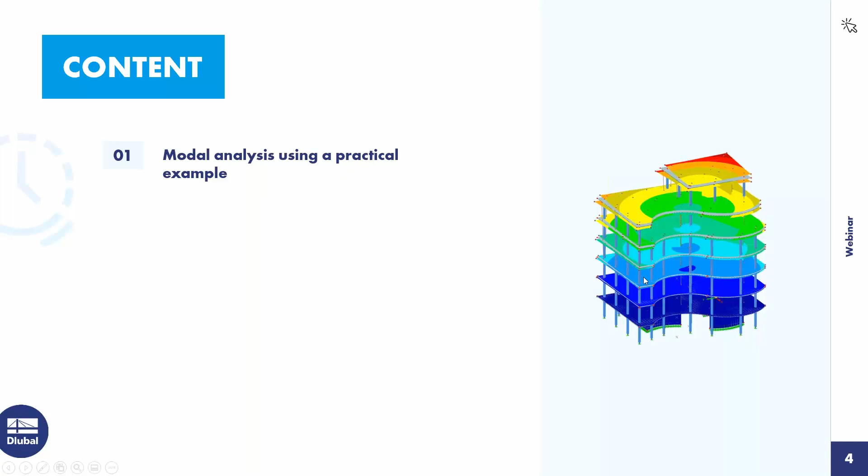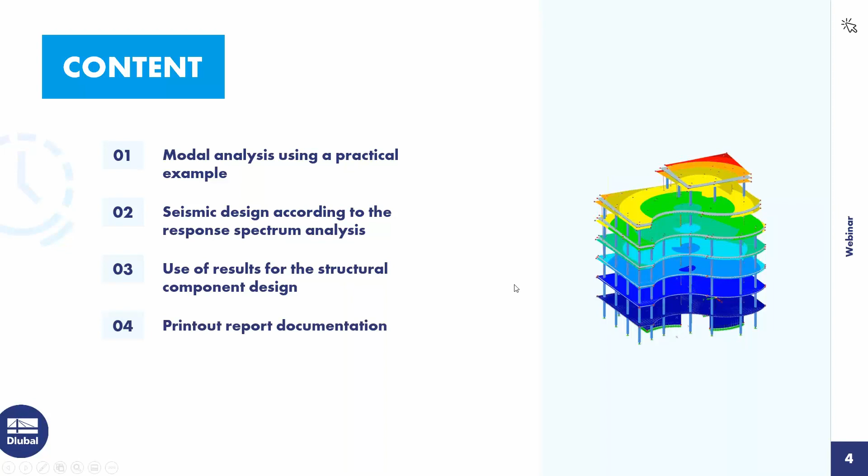To the agenda today: first point is modal analysis using a practical example, that's the example here on the right side of the screen. Then point 2, seismic design according to the response spectrum analysis. Then use of results for the structural component design. And the last point is printout report documentation.

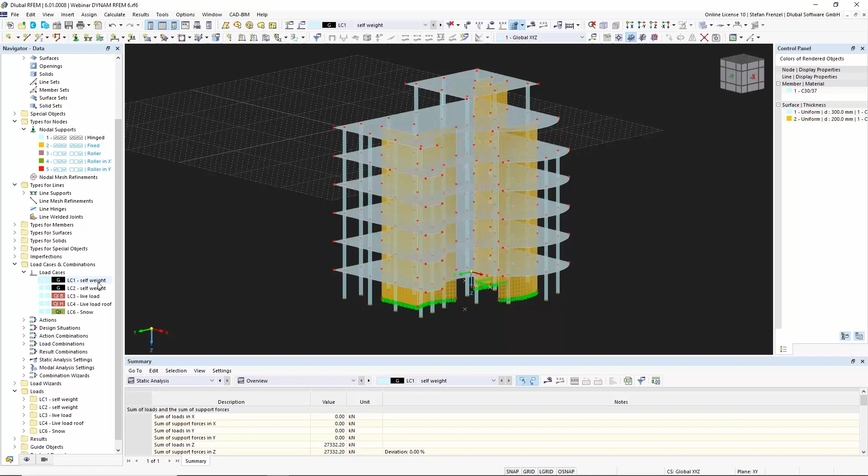So how can we do a modal analysis? A modal analysis is not another add-on module anymore, so we can define the modal analysis directly in a load case. That means in the load cases we have categories, and for this category static analysis is clear - we can calculate internal forces, but here it is also possible to do a modal analysis. If we want to do a modal analysis, then it's of course possible to choose the masses which have to be imported into the program.

You see here load case number 1, the self-weight. We want to import the masses from load case 1 into this modal analysis. That means the self-weight is activated, and we have here some modal analysis settings.

That means modal analysis setting 1. We want to calculate 4 eigenvalues with a Lanczos solver. It's also possible to change the settings, add some settings, or delete the settings if you want.

These settings are normally just important for the modal analysis. At first you have to choose how many eigenvalues you want to calculate for the structure. In our case, we have 4 eigenmodes. It's also possible to calculate automatically to reach the maximum natural frequency, where you give in a maximum frequency and the program will calculate so many eigenvalues until 1600 Hertz.

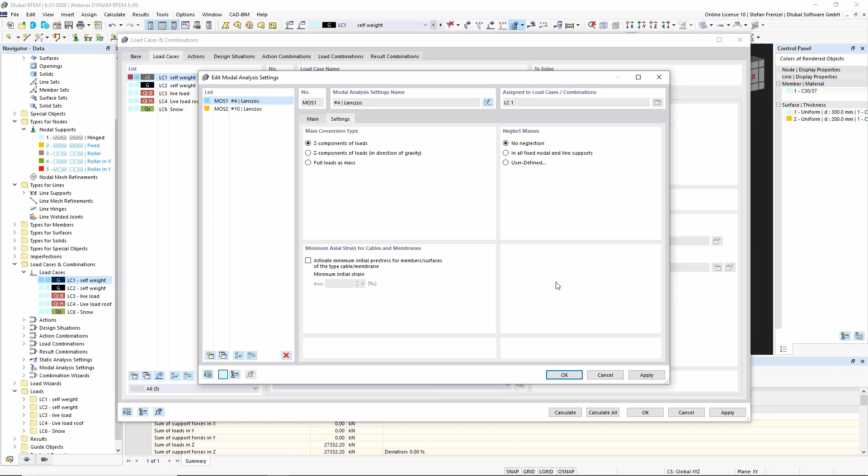We also have here a user-defined option, which is really easy. You can directly choose surfaces, lines, members, or nodes where you don't want to have the masses included in the calculation. I want to show you that a little bit later. At first I want to click here on OK, and then we click also on OK.

We have to delete the results, that's clear for us. Now you see on the top that we have a small red button and a blue one. The red one means it's not a static analysis, so that means here it's a modal analysis. We do the calculation now.

The program will now calculate the eigenvalues of the structure with a Lanczos solver. Here just one core of the computer is used, caused by the eigenvalue analysis. It's not possible to use more cores than one.

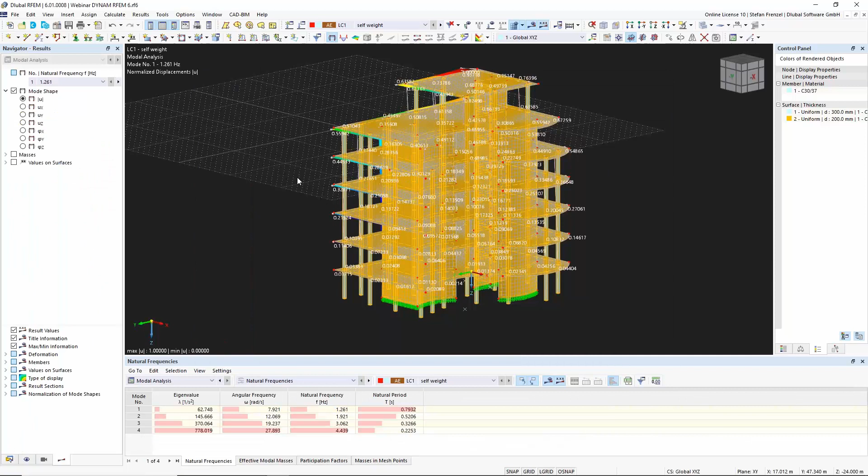And then you see the results. That was normally really easy. So we have now the natural frequencies, where you can choose, for example, the second frequency or the third one, and that's all now in the navigator, so in the navigator of the results.

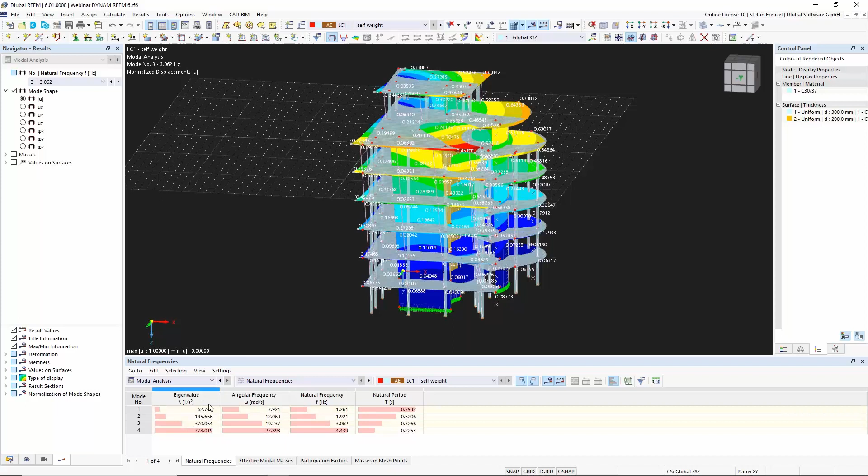Another thing is that it's possible to have a look in the table on the bottom, where you can see the natural frequencies, the eigenvalues, the natural frequency, the natural period. Then you see, of course, the effective modal mass factors.

These effective modal mass factors are also important, because normally we need 90% of the effective modal mass in each direction for the earthquake calculation, and these you can see directly on the top or on the bottom. We also have the rotational effective modal mass factors, but that's normally just for development, not so important for the normal user, because the normal user who wants to calculate earthquake loads uses normally just the translational effective modal masses, which are in X and Y direction, and maybe sometimes in Z direction.

The participation factors are also given out here, you can see it on the bottom. And then you see the masses in mesh points. Maybe you know this from RFEM5. It's also possible to have a look at the masses in the FE mesh points.

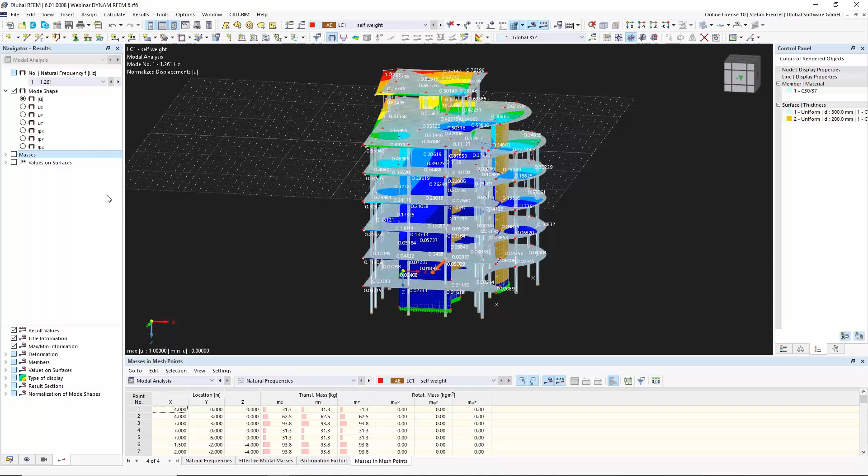That's normally not so easy to get a good look at this table, because you have to scroll down and maybe you don't find the node you want to use. Therefore we now have a graphical output for that. You just go to the navigator for results, click on masses, and the program will show you all masses at each FE mesh point. Let me zoom in a little, and then you see what we call mass balls in each FE node.

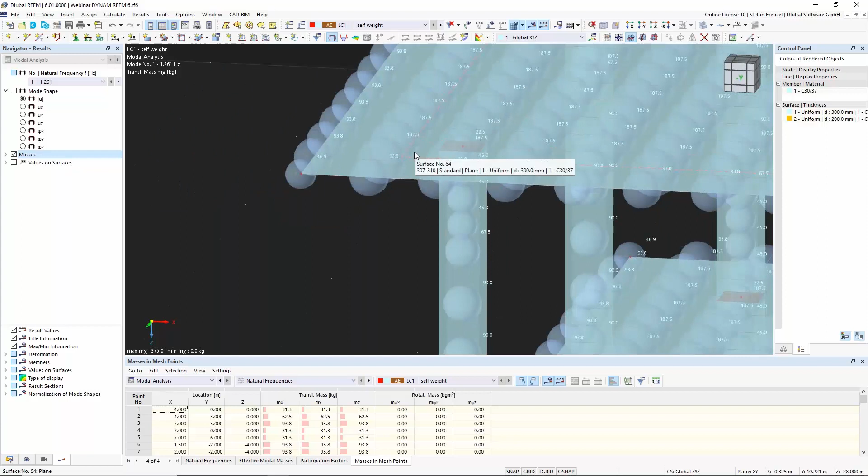Here you can have a look at them, and maybe decide, for example, that you want to deactivate the masses for this surface or for this top surface, then you can control it afterwards. So we go to Edit, and here in our modal analysis settings we can neglect the masses. I want to use user-defined, and I just have to click my object, what I want to have, and that's all. Please neglect masses in all directions and around all directions.

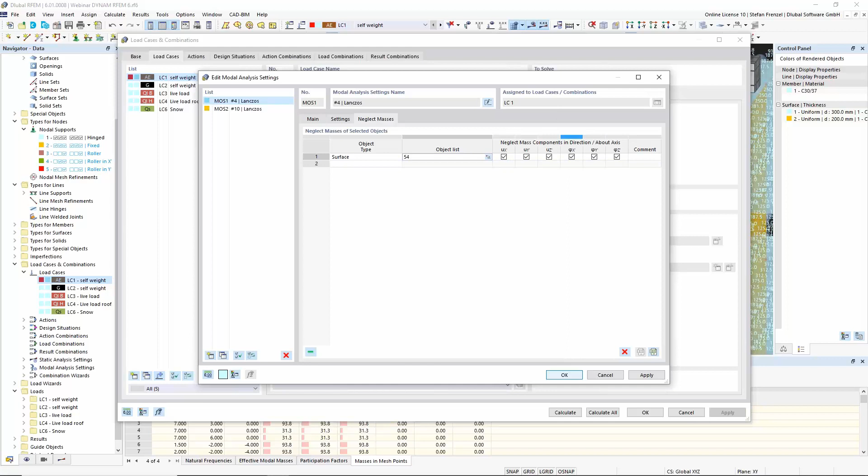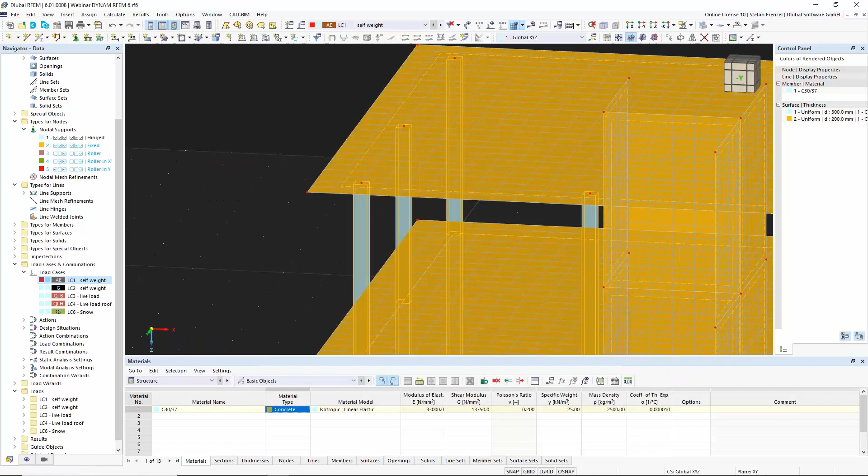If I do this and run the calculation again, I will get the result. When I look at the masses now, all masses will be neglected on the surface. I think that's an advantage in RFEM6 that was not possible so directly in RFEM5, because here you see directly the values at each point, each FE mesh point. It makes it really easy to control the whole result.

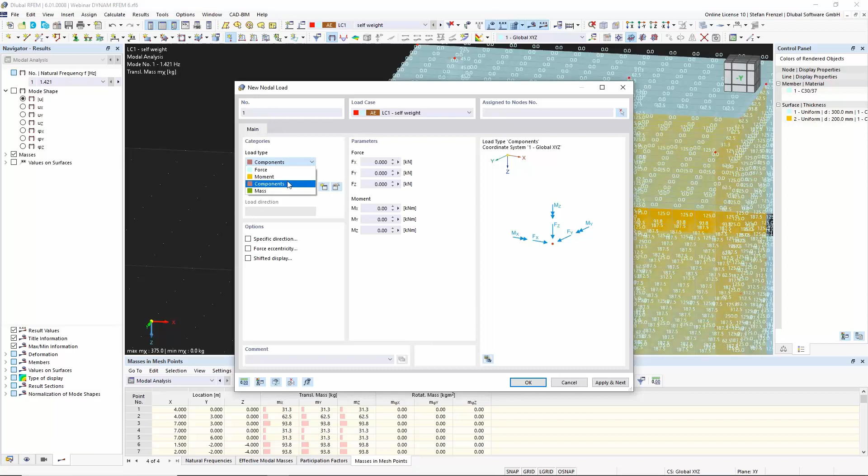Another option here, if you do such a modal analysis - in RFEM5 it was also possible to add additional masses, but only in the add-on module. Here we changed it a little, and now it's possible to add masses with normal nodal loads, line loads or surface loads. If you click on nodal load, for example, then for the load type you can choose a mass.

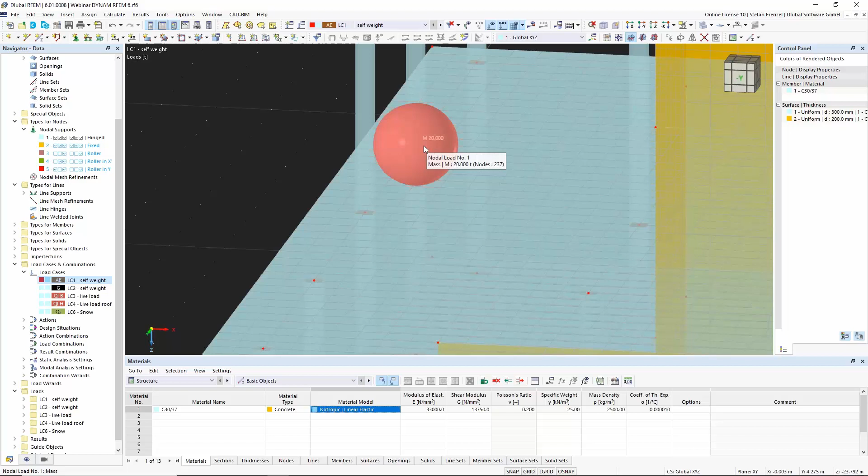If you write in a mass, maybe 20 tons, and put it in here, then you will see in load case number 1 a mass ball with 20 tons. This mass ball is also considered now in the modal analysis of the whole structure. That's just what I want to show you here - it's also possible to do it for surface loads and member loads, to add additional masses in the program and have a direct view of them. That was not possible in the old programs, and that's also an advantage here.

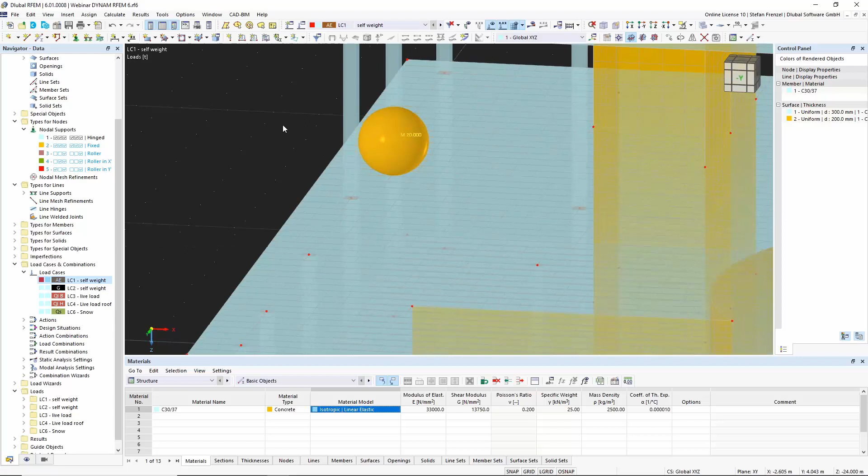So then I want to delete this load, because now I think we want to do a real modal analysis for the whole structure. Therefore I will first change my modal analysis settings, because here we also have the neglection of masses on, so we don't want this, and we want to calculate 12 eigenvalues with a diagonal matrix, which is completely enough for a calculation afterwards for earthquake calculations. We just want to consider the x and y direction, so I deactivate the other direction z, and also about the axes x, y, z, because it makes no sense for us.

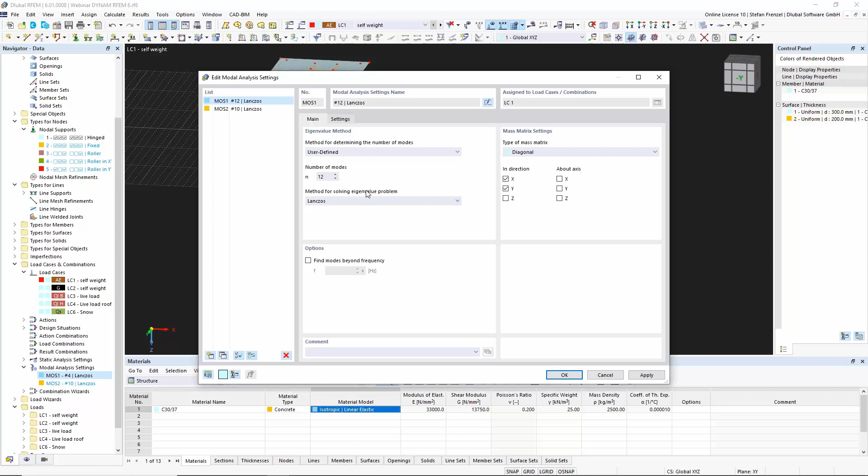The calculation is faster when I don't have to consider all directions, and it's easier for me to reach the 90% effective modal mass factor afterwards. So I don't need so many eigenvalues for that. This means the performance is better afterwards.

Okay, now we are here in our structure. How was it in the old one? It was normally always like this - did we do a static analysis here? Wait a second, I just have to change it back. So that we now need, of course, a modal analysis. If we want to do such a modal analysis, then I first have to choose a design code.

For example, here in our structure, should it be Eurocode 8? You can also choose ASCE or whatever - that's not so important for the program, but the important thing is we can now create a design situation. For this design situation, it's possible to create a seismic mass combination. That means the program will calculate a mass situation for our modal analysis according to a design code, and the program will do it automatically.

So that means for us, if I go now to action combinations and load combinations, the program creates here a load combination. So now I have my masses, which I need for the design, or which I need for the modal analysis according to the standard.

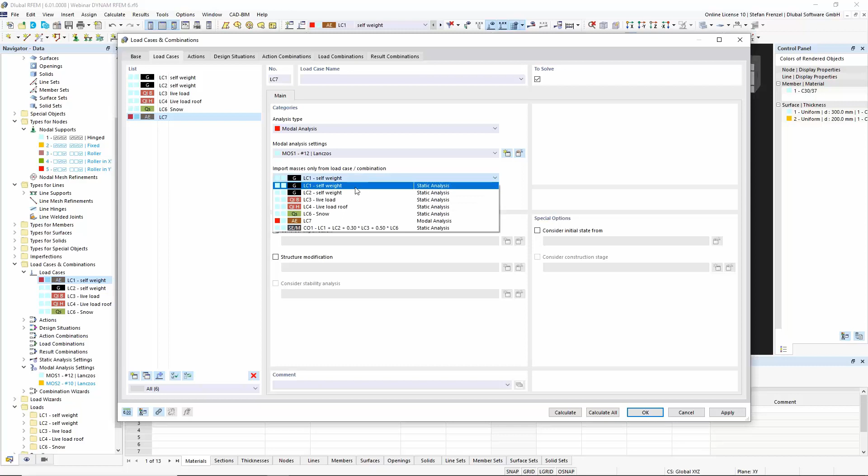The important thing now is that we can use here the automatically created load combination for my seismic mass combination. That's important, because that was not possible in the old one. Here it is now possible to consider this mass combination or load combination for the calculation of the modal analysis, or of the eigenvalues.

With this option, we go here now on OK, and then we do a calculation of the whole structure. You will see now the program will calculate all load cases and, of course, the seismic mass combination, and afterwards the load case number 7, my modal analysis.

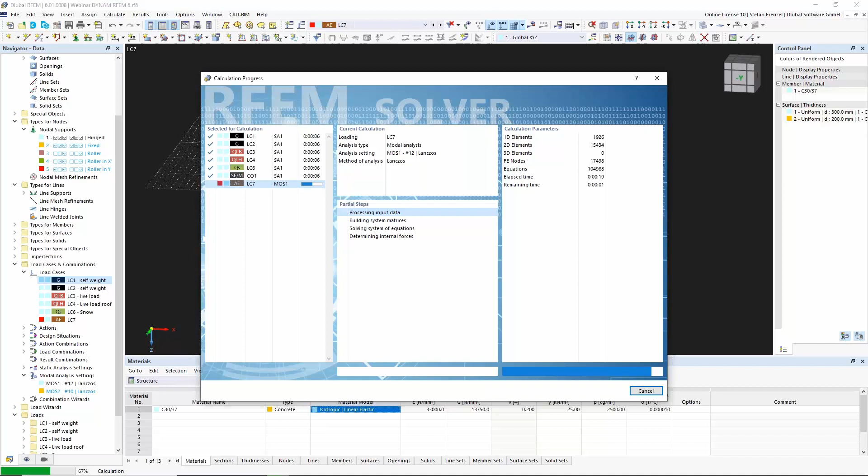In this case, you saw also that the program calculated all load cases nearly directly at the same time. That means we have here a multi-core calculation. The program can use all cores of your CPU, which makes it really fast in this case.

So now we want to deactivate the masses because I don't want to see them. Here maybe I want to have a look on the mode shapes. But what is important for me now here, it's really easy.

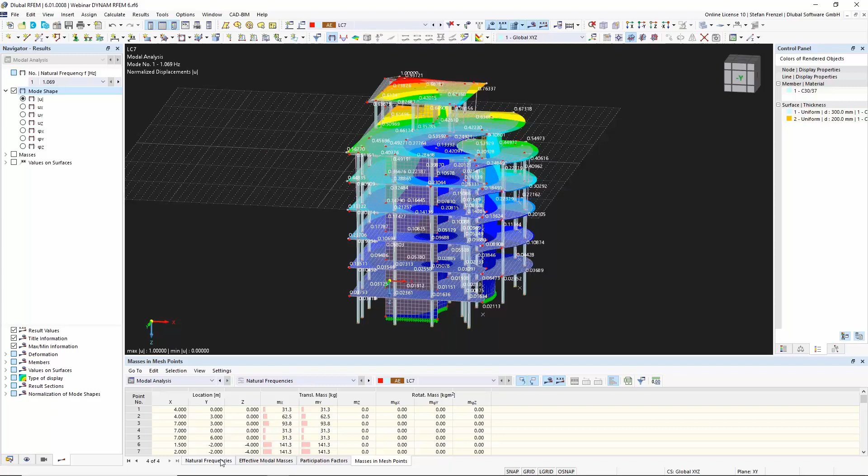The important thing, of course, is the effective modal mass factors. So therefore, I just have to click here on the modal analysis, the natural frequencies or the effective modal mass factors, what I want to see.

And now I can see I have 97% in the X direction, and nearly 94% in the Y direction. What is now really good for me, because with these values I can of course do a response spectrum analysis.

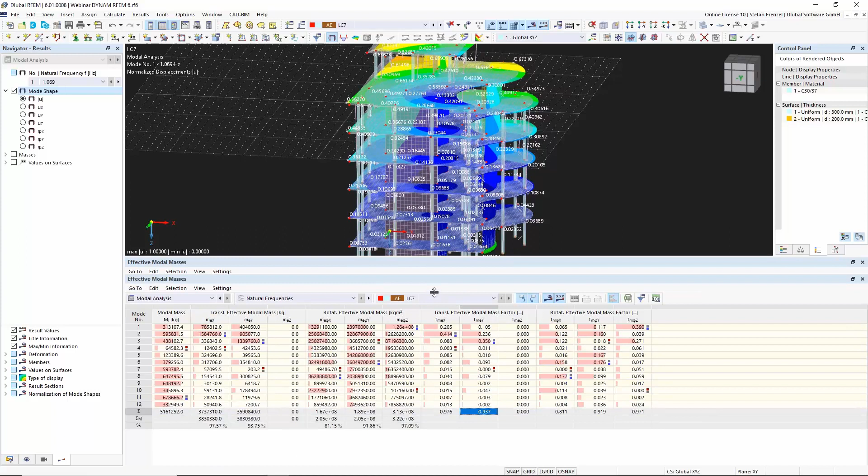But how we can perform a response spectrum analysis, that is now the important thing for us. To do a modal response spectrum analysis, we have to go back in the navigator. And in the navigator, we have to click again on the base data, because here in the base data we can switch on and off our add-on modules, which is also important for us.

In this case, we go on the add-ons, and here it is now possible to choose the response spectrum analysis. The response spectrum analysis will calculate the internal forces of the whole structure, and with these internal forces we can work then for the design of the concrete members or the concrete surfaces, because afterwards we can create here a result combination with the maximum loads, or the maximum internal forces.

So now you see here the response spectrum analysis, what we added. Then we have to go, of course, here in the Standards 2 button. Here you see, okay, we do the calculation according to the national annex of the Eurocode. And for this national annex, we can now also just create here our response spectra.

If you want to have a response spectrum according to another code, then you have to change here in the Standards 2 window, the national annex or the design code. You can also choose here the ASCE 7, or you can also use the old DIN.

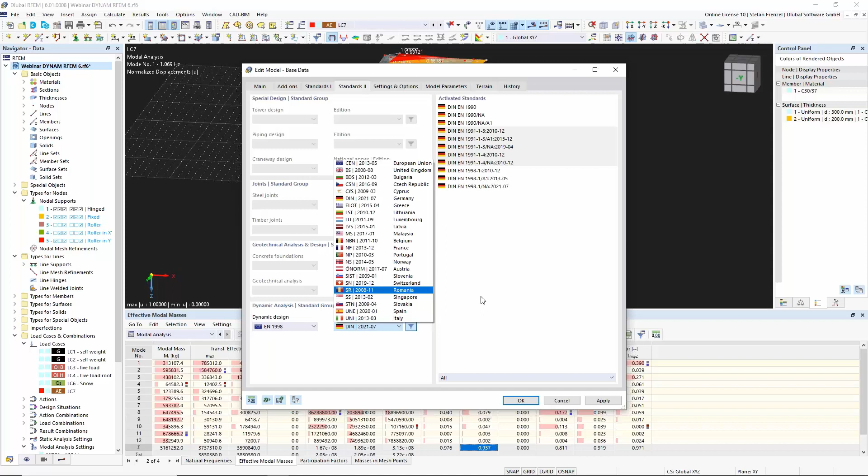Of course, you can use here in the Eurocode also the other national annexes which are available now for the program. You see that we have a little change in the national annexes, because now you see the year of the national annex. That is also important, because so you know what national annex you want to use.

We have also some national annexes which are red, because they are normally not usable in Germany, for example. That's the old one. But here we have the new revision, and therefore we can take this one.

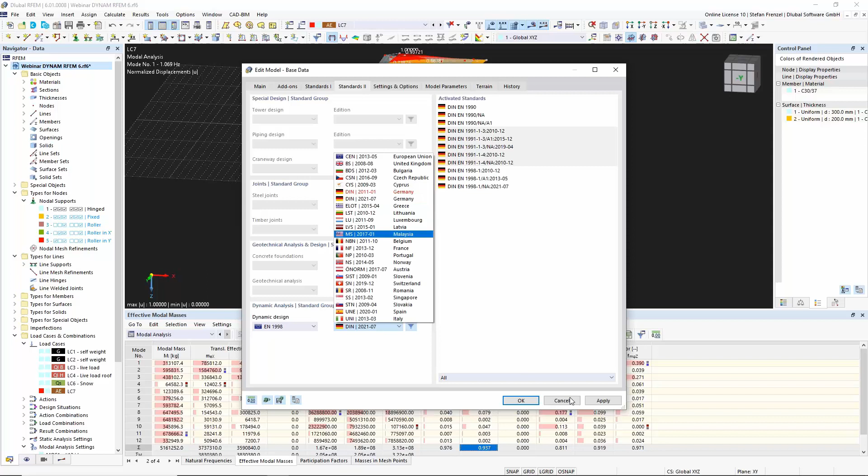Okay, oh sorry, I closed it with cancel. That was not so good. I have to activate it again. Okay.

So if we do such a calculation, or if we do here such a response spectrum analysis, then you see that we have here spectral analysis settings now as a new part. And of course we have here on the bottom the dynamic loads.

The dynamic loads are also important, because with dynamic loads it's possible to create response spectra and also to use accelerograms from real earthquakes. These are recordings from real earthquakes, and you can use these accelerograms to calculate the response spectra. But how can we perform a response spectrum analysis?

That's really easy. We go to edit again in the load case and create a new load case. In this new load case, we have a new analysis type. So you see we do nearly everything in the load case, and here it's now possible to do a response spectrum analysis. This has some spectral analysis settings, and you have to import the modal analysis from a load case.

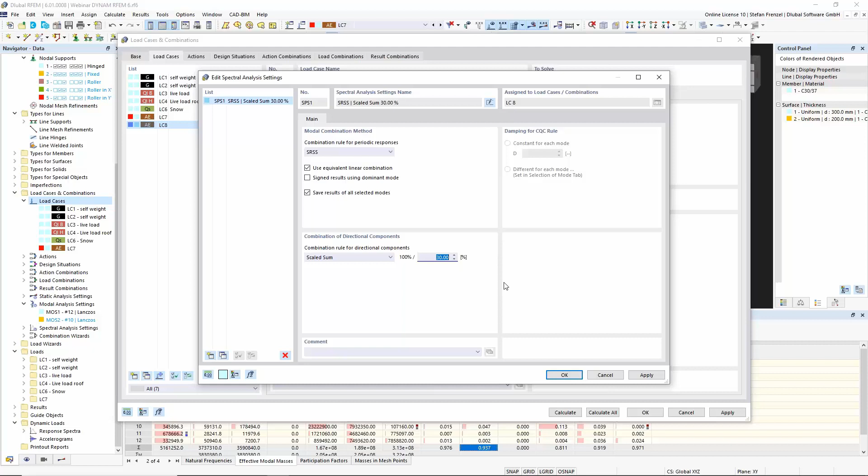In our case, we want to take this one, and we can confirm with a click on OK. Then we see some small info about it: SRSS rule, scaled sum, 30 - that means scaled sum 100% and 30% for the other.

It's also possible, in the options, to consider accidental torsion. That means we have to give in the eccentricity, which we can calculate by the building length. We can activate this, and the program will directly take the building length in X and Y direction, or we can also take a user-defined length if we want. These 5% come from the Eurocode - maybe other codes have another value, that's why you have the option here to change this.

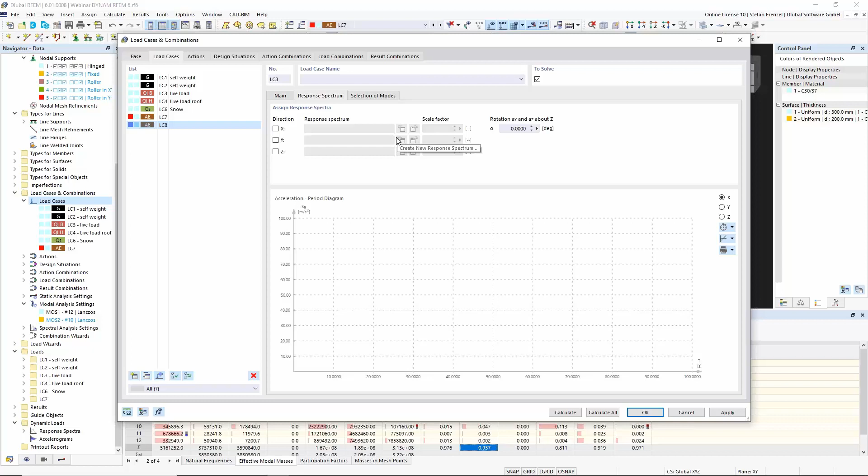In our case, we don't want to consider accidental torsion. We want to switch now to the response spectra, because we have to create a response spectra to use for the calculations. In our case, we want to have a response spectra in X and Y direction, because the direction we neglected before for the modal mass analysis we don't need anymore, so we just do a calculation for the X and Y direction. And here for the response spectra, it's now possible to edit it.

As I told you before, you can see here the definition type according to standard Eurocode 8 from 2021, from this year. And here it's also possible to give in a user-defined one, or to generate from an accelerogram. Therefore, we have a database I can show you from the library, and there you see many accelerograms.

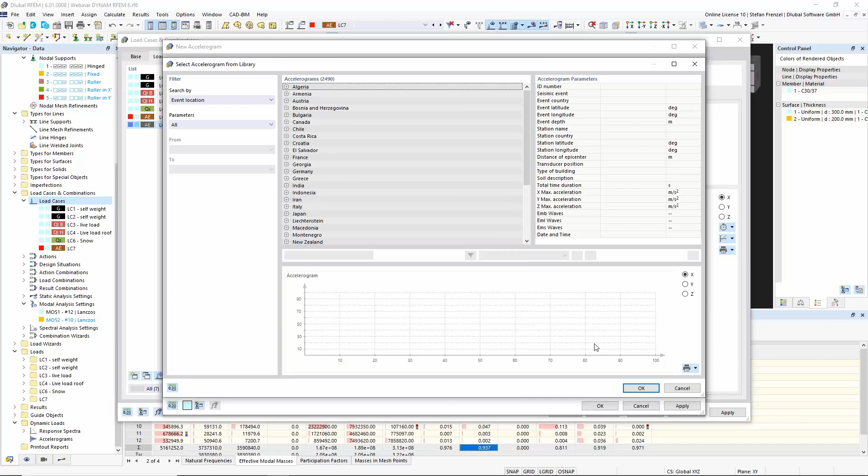So we have here 2,490 accelerograms from over the world, which you can use now to do a calculation, or which you can use to create a response spectra out of that. Yeah, for example, Georgia, this one you can use also.

But here we want to use it, we don't want to use an accelerogram. We want to use this from the Eurocode. If you want to use the spectra from the Eurocode, we have to go...

On dlubal.com. And here's a possible... wait a second, it's in German, sorry, that was not so good. Here you see on support and learning, or no, on the solutions, sorry, the snow load...

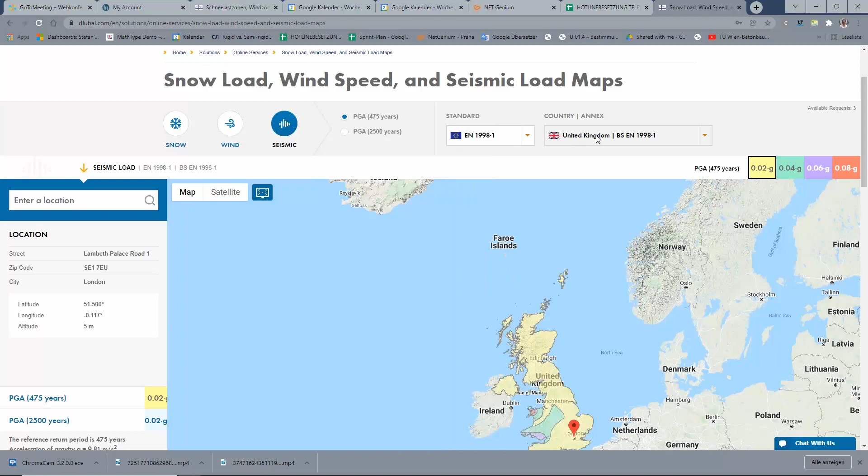and wind speed seismic load maps. And for these ones, of course, you can choose here seismic and can take the values, for example, maybe from Germany, Eurocode 8, and of course... no, I can't find Germany. Is it my problem?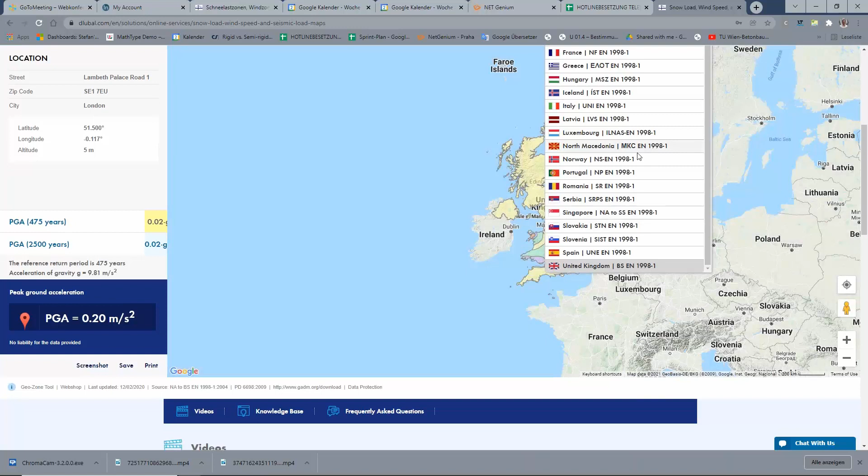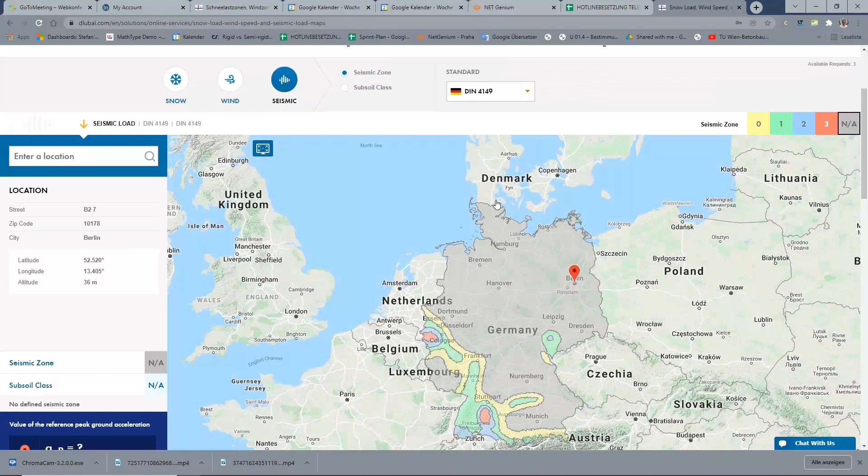That's good. Okay, we see here the old German code, but here normally we should have also, now we have Germany. Okay, sorry. And here you see, of course, the...

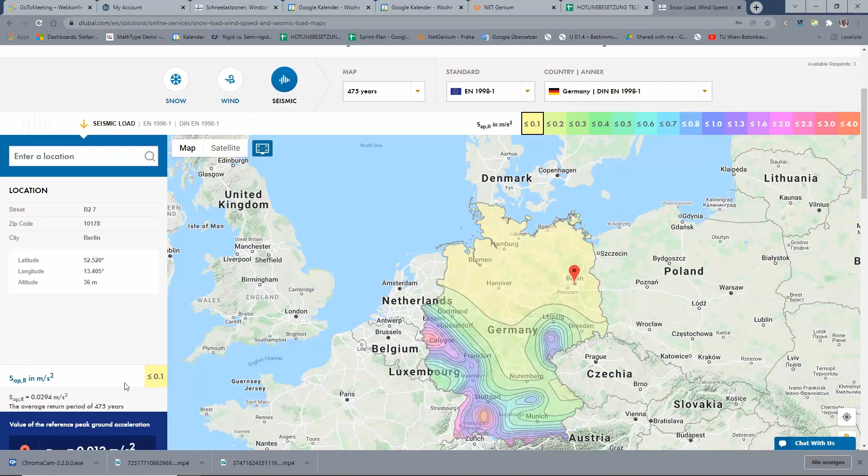SAPR, so that means it's the spectral analyze, or the spectral value for that. And of course the AGR, so which is the acceleration for this, or for Berlin, for example.

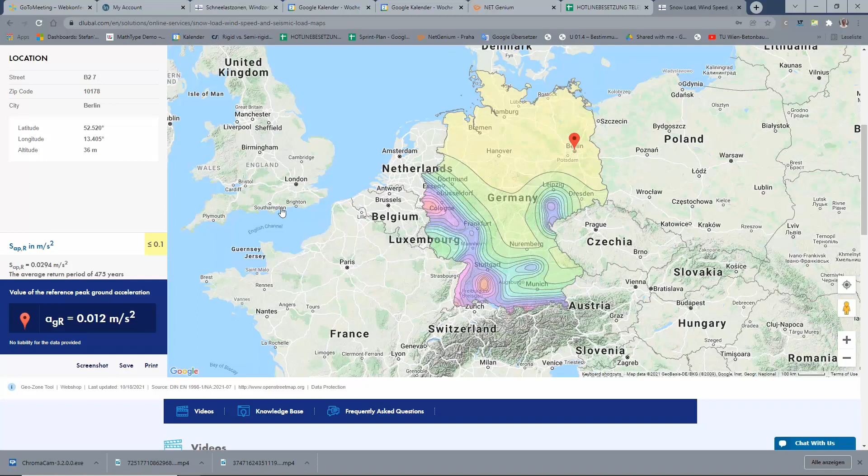Otherwise, is it also possible to enter a location and to get here the real values what you want to use in this case. Here in our case, we take the input values which are given directly.

It's also possible, of course, to take here maybe another ground type, or maybe we take here another value. SAPR is 1.5. Yeah, okay, that's okay.

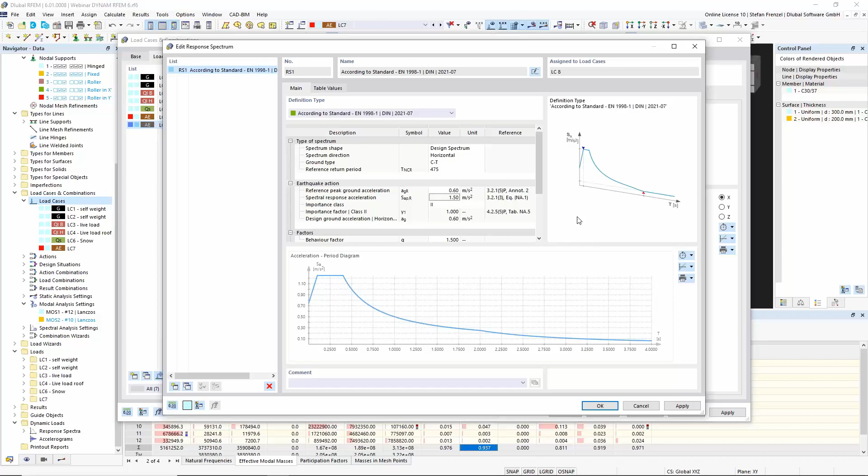The important thing here is that you see, of course, the response spectra, and if you click here on OK, you have here a selection of the modes.

The selection of the modes was also in the old DYNAM Pro module in RFEM 5. You find it here now also in the load case, because it's now a property of this load case, and here it's, of course, possible to take here the 5% value.

That means for you, okay, we have now here 91% in X direction, which is of course okay, but here in the Y direction we have just 87%. So normally we need so many eigenvalues that we reach the 90%, and we can, of course, take all eigenvalues which have a higher factor than 5%.

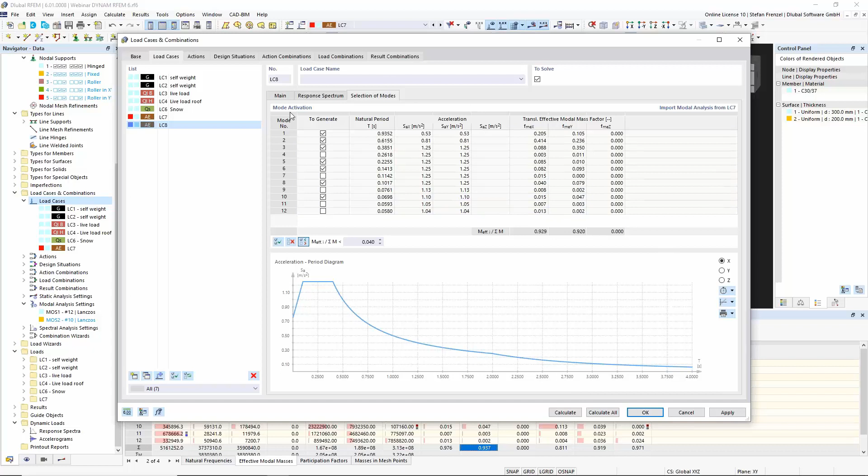Now we can go back on the main tab, and now it's possible, of course, to calculate all. You see that the program will calculate now many load cases, 8, so that are sub-results, and that means the program will calculate them internally and will give you then, of course, the results for this one.

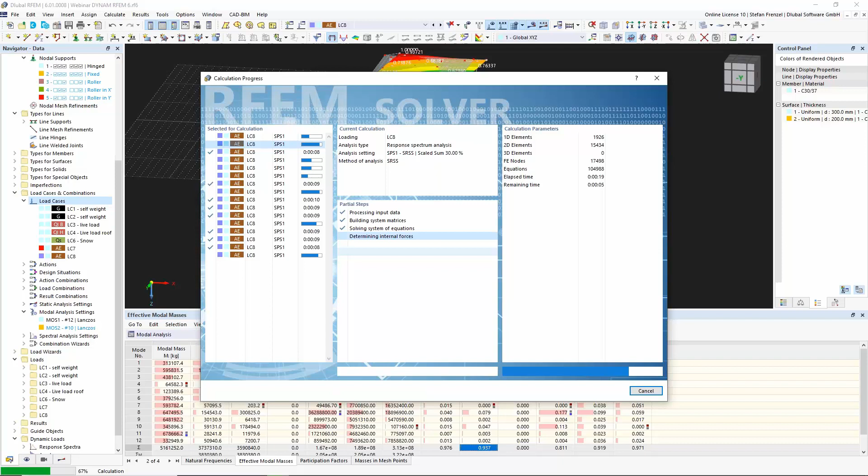If you deactivate the sub-results in the spectral analysis, then the program will just calculate the X and Y direction, and that's all normally. Now you see, of course, here the results.

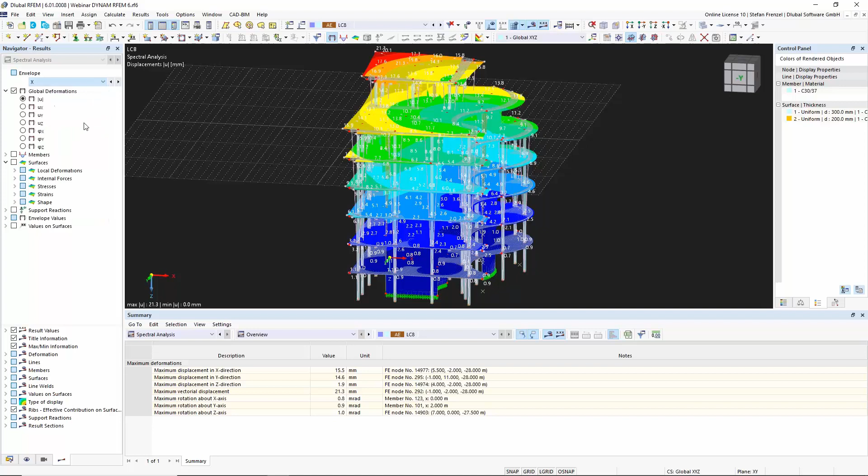At the end, the important thing is the scale sums envelope. That means the 130% rule, or the 30-100% rule. That's the scale sum envelope. But here we give you also the X direction, so all results in X direction, and of course all results in Y direction. And then we give you, of course, the results for each mode in each direction.

What you can see here now, we just get internal forces. So the program will do a calculation of the internal forces directly. That saves a lot of performance, because in the old program it was like that we calculated some earthquake loads,

and we get in the old program in each FE mesh point an earthquake load, and that was really time consuming in this case, and this we switched a little bit, and we calculated here directly the internal forces for the whole structure, which makes it more easy and more efficient in this case.

You see, of course, here for the spectral analysis an overview, and of course the load case number 8. Here it's also possible, of course, to have a look on the results by the member. Yeah, that's always possible.

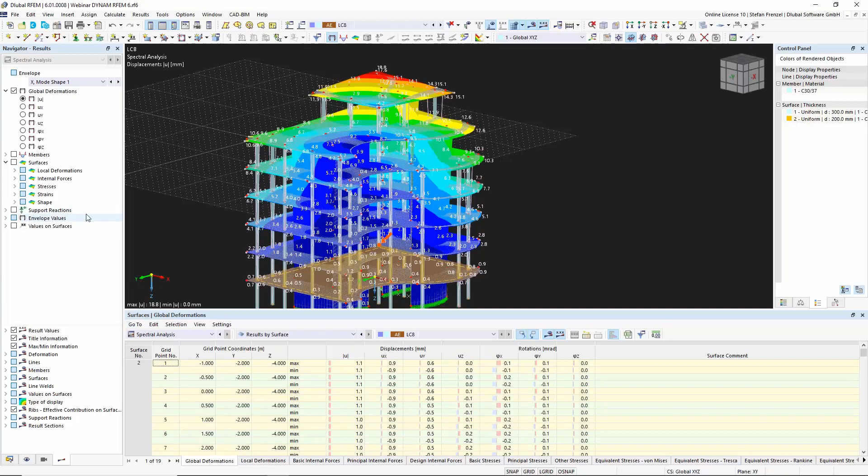Normally, is it enough to have a look here on the results? Yeah, because these results are of course important for us. But at the end we have to do a calculation of a new load combination, or a new result combination, where we also consider the self-weight of the structure. So that are just the earthquake loads in this case.

That was the problem in the old program. In the new program it's no problem anymore, because here the program will do a calculation of this special design situation completely automatically. So how can we do this special design situation?

We can go back in the edit module for the load cases, and here it's possible to create a new design situation. For this design situation, we take the ULS seismic, and for this ULS seismic it's possible to create a result combination. So that means for this design situation type...

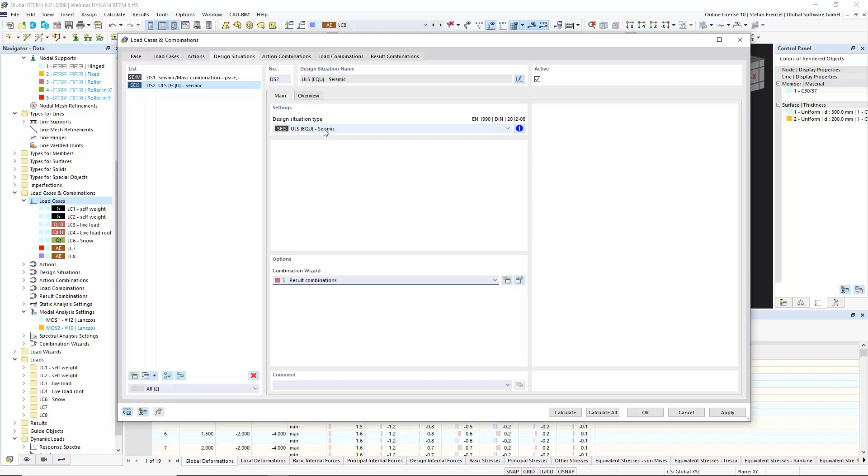Wait, I have to cancel this because we already have a design situation, we need a new one. So in this case we create a seismic design situation, and the load combination according to the result combination calculations. That means the program will do this special design situation for us with a result combination.

So we can click now on the result combination at the end, and then you see the assignment, and you see that the program will take here the maximum internal forces out of the earthquake design in this design situation.

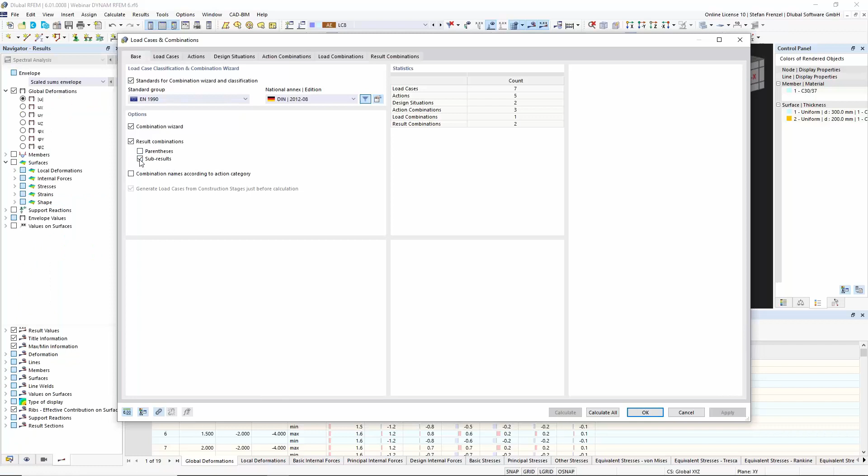So I just want to show you that it's also possible to activate sub-results for the result combination. Because when I activate the sub-results, it's possible to choose the scaled sum of the envelope extra, or to use just some individual mode shapes.

For example, if I just want to consider the X direction for my design situation, then it's also possible here, so I don't have to use the scaled sums at the end. It's also possible to take another value for that. That is also new - the program will do this calculation completely automatically.

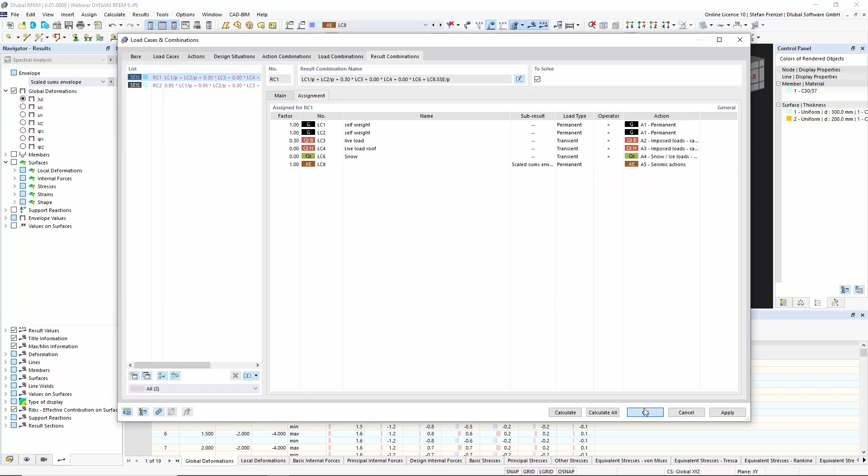That means for us, if we go here on OK, then it's of course possible to do the whole calculation again. So that was all in this case, and I can have a look now in my result combination, where of course the self-weight of the structure is considered, and also the earthquake loads are considered.

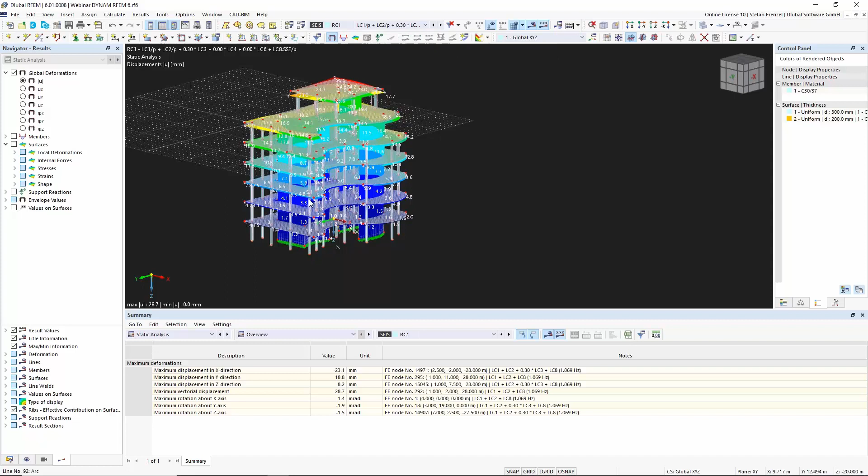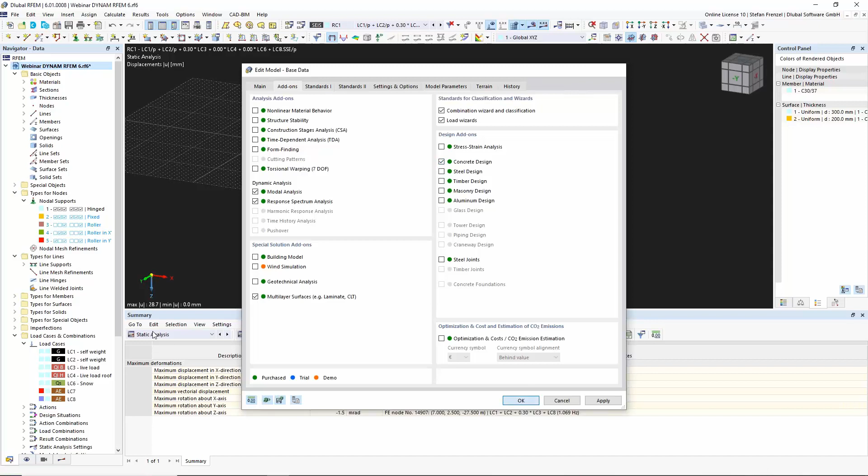With this design situation, is it now possible to do a design according to a material standard? Yeah. For example, we can do it like this. We go in the base data and say okay, we want to activate the concrete design add-on module. Then it's also possible now to go here in this design situation. This was this one.

Wait a second. What is the problem? Oh wait. Base data. Maybe, yeah okay - I clicked again on cancel, and that was my problem.

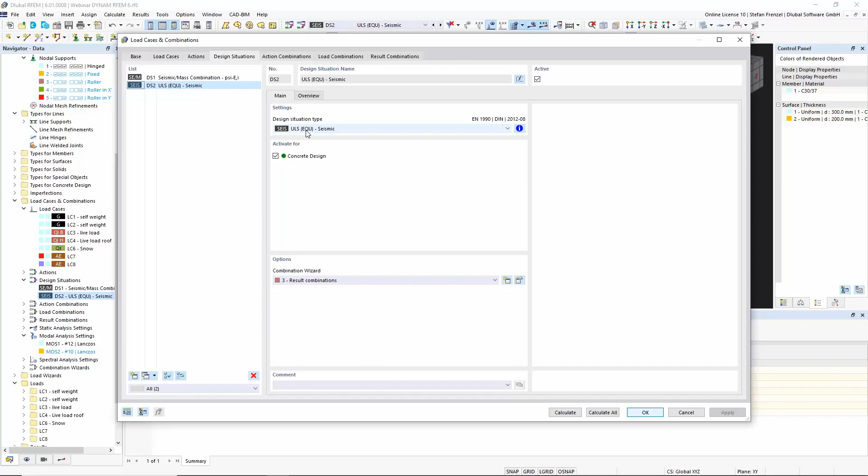So here it's now possible to go on edit, and then it's possible to do a concrete design also for my seismic design combination, which is normally a special design situation and which is normally not the ULS in this case. Normally you take other design situations, but it's also possible to do this calculation now for my concrete, or for the whole concrete structure, and to design according to my maximum earthquake loads.

So that was this for the calculation, or to come to the results at the end, and also to do the combination of the results. The last part I want to show you now is that it's also possible to get here the shear forces for each floor, and also the deflection for each floor.

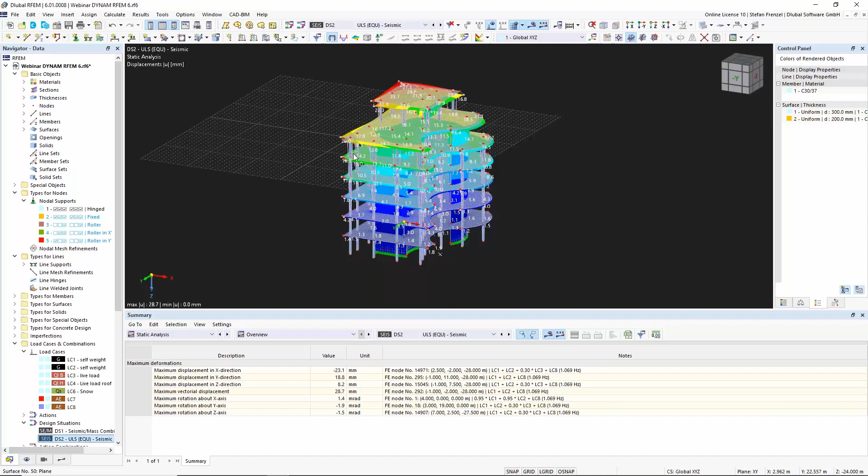That was also wished for RFEM 6. Therefore, we have here in the base data also an add-on module which is called building model. For this building model, when you activate this, it's now possible to define the floors by its own, and then of course to get the results for each floor in the calculation.

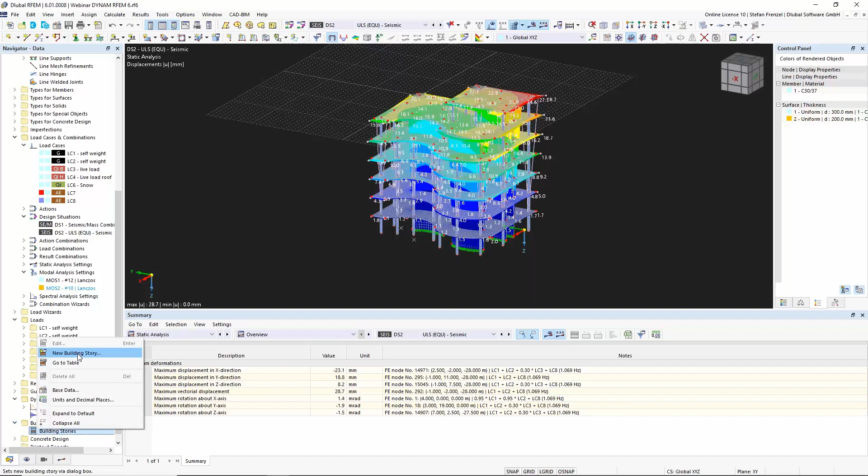Therefore we just have to define first the building model. That means for us, okay, we want to create a new one. My Z top is -4, and here I want to create 6 floors without any diaphragm or something like this.

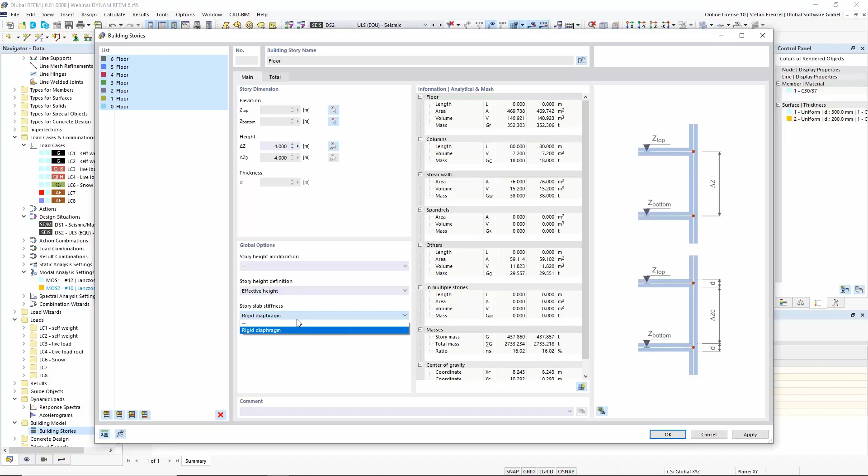You see it's also possible to do a diaphragm calculation afterwards, but here in our case we created the whole structure with the real floors. With real floors in this case, therefore we don't need a rigid diaphragm for that. That's why I delete this one and go on OK. So the program creates now here my stories for each, or my 6 stories in this case.

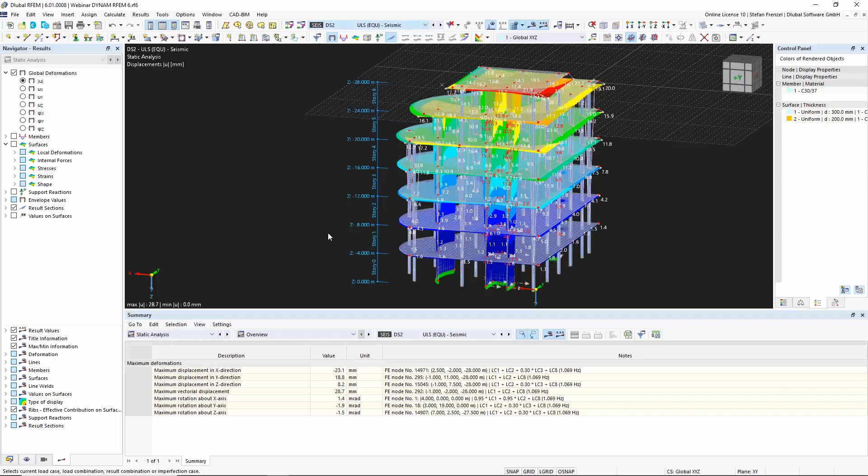And here it's now also possible to get the results for this. Therefore, we go for example in this load case number 8, spectral analysis, and here we have now results by stories. What is really new here in the program.

Here you see the story forces from the earthquake calculation, as well as the centroid coordinates and the interstory drifts, which are also important. Afterwards, maybe you want to do a pushover analysis, or you need to consider the story drifts for the calculation of second order theory.

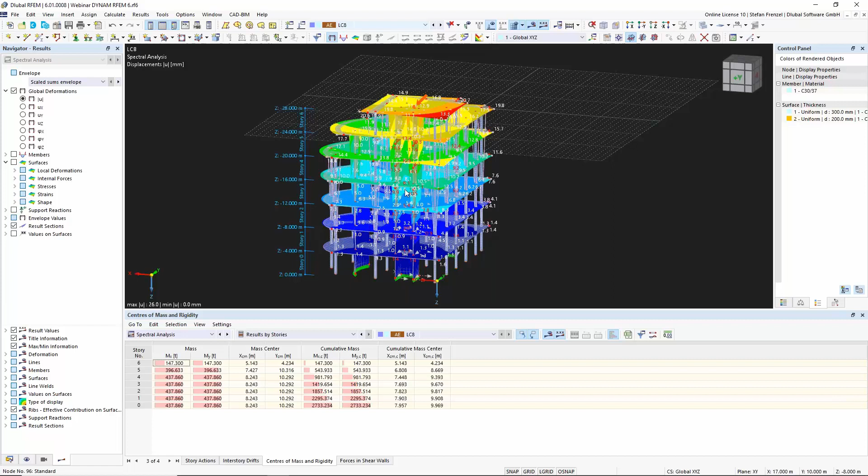Then you will get directly the story drifts here. You see the centers of mass and rigidity for each floor, which is also important, and of course you will get the forces in the shear wall.

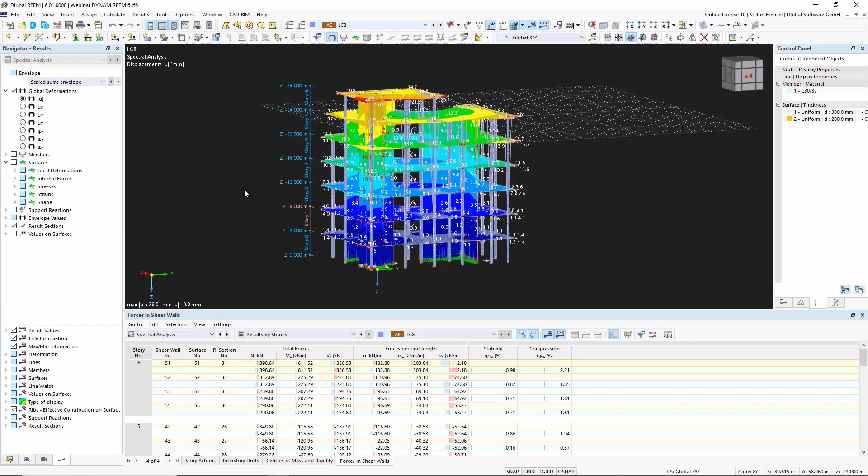So the program will create result sections for each shear wall, and these values you can also use directly to do a shear wall design for each story, or for each wall in each story. That's also something new here in the program I want to show you.

You see here the result sections for each floor, each shear wall, and these shear walls you can design afterwards. You will get the forces per unit length for each shear wall in this case.

Okay, then we want to come to the printout report. I just want to show you the printout report a little bit. Therefore, you can click here on New Printout Report.

In the printout report, you will find the add-on modules like in the old RFEM, so you will get all the stuff you did here in the program directly in the printout report. That makes sense, of course.

So, what we don't want to see: spectral analysis, support forces, maybe internal forces, sections we don't need. The interstory drifts are important for us, maybe, and the forces for the shear walls. Modal analysis settings is also important.

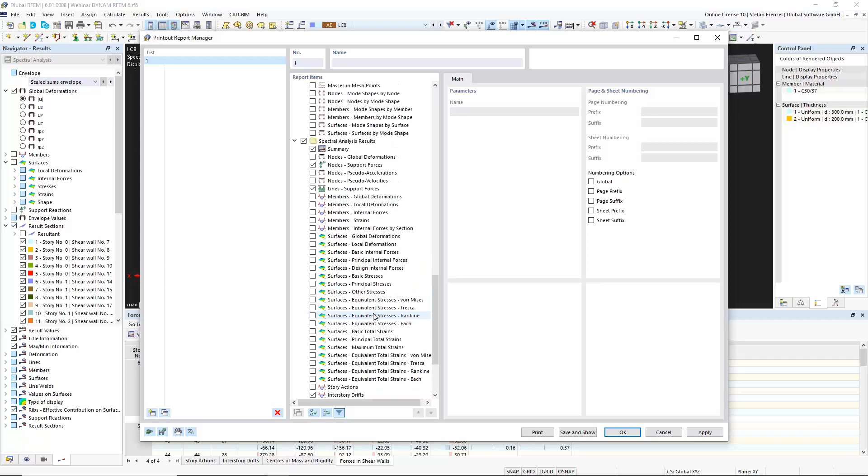Then, of course, you see what's possible here, the concrete design. We don't want to see graphics, and we also don't want to see that now in this first one. Then we can go on OK, and the program will calculate the printout report.

What's new here in the program: it's now possible to work also in the structure while processing the printout report, so you don't have to wait normally for that. Oh, did I wait a second?

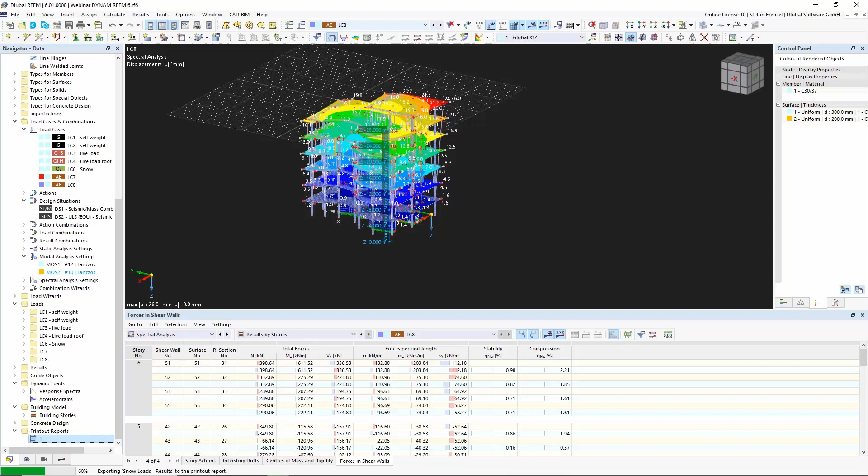The printout report is created. Then we want to open this, and of course you will see here the printout report. It's now possible to switch the printout report on each side.

Then you can go here on RFEM again and work also with RFEM. Normally it should work. Okay, it's been generating, okay.

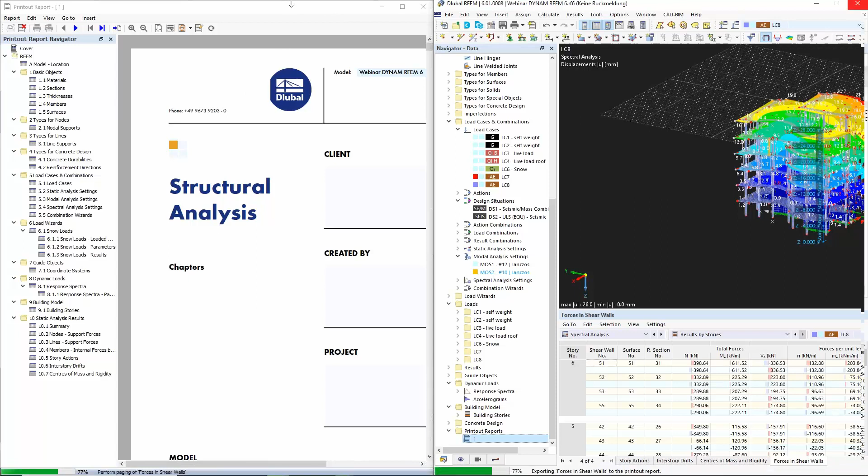You will see that you will get here all the stuff. You will get here the response spectra parameters, and you will get here the building stories.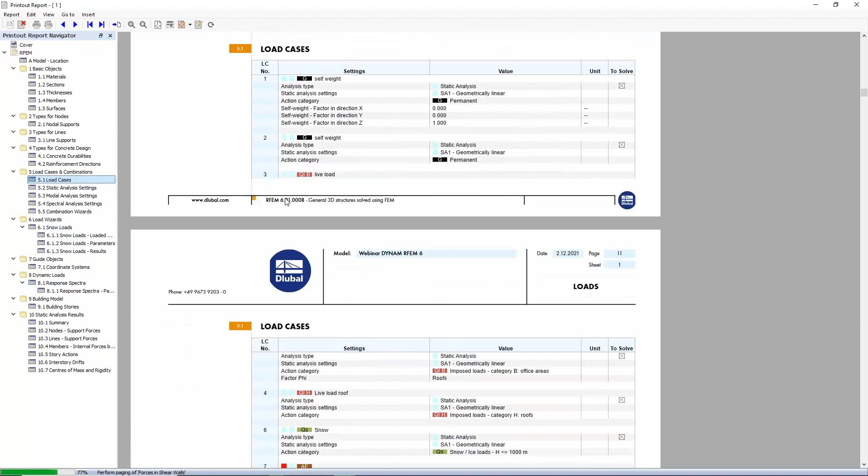Of course you will get the load cases, and in these load cases you will see, for example, that you have a modal analysis and a response spectrum analysis. You see all the options used for the calculation. Then you will get the static analysis results, and at the end you will also get the modal analysis results.

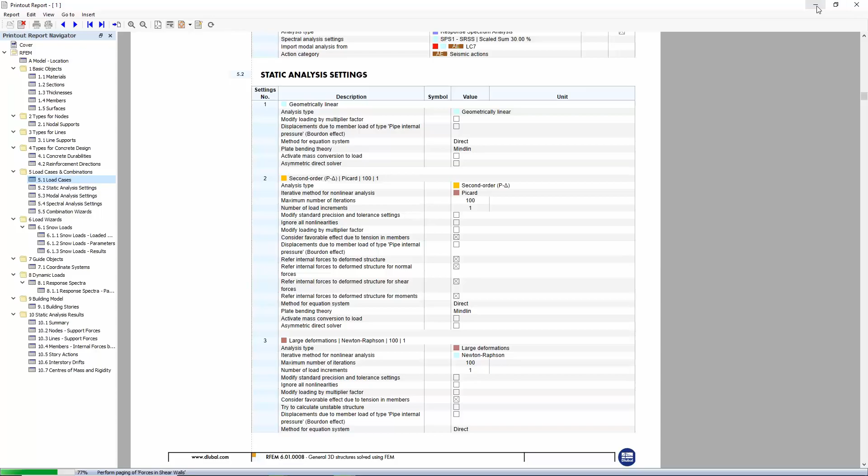What is normally also nice is that you want to print some pictures. That's of course possible, wait a second.

Yeah, Andreas, okay, I think... Yeah Stefan, I think the forces in shear walls are printed in the printout report, that's a lot of content. Was maybe not a good idea. Okay, that would take some time, but it doesn't matter. You showed the printout report.

It was a quick introduction to our new programs, or our new add-ons. If you want to go through the webinar with the recording and the provided model, then you can use the recording and the provided model. I will show you how you find them.